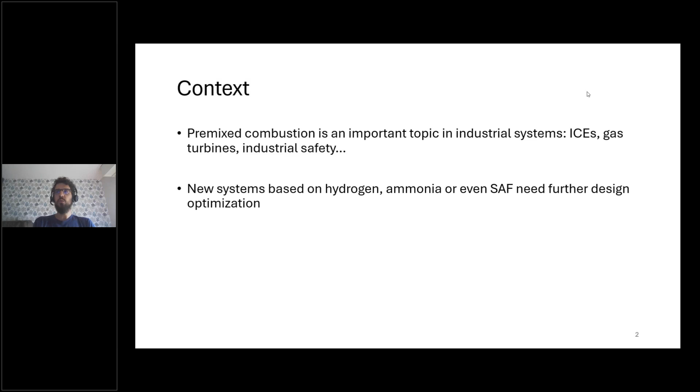Here I will be mostly interested in this presentation on premixed combustion. As you probably know, it's an important topic, especially with applications in industry in systems such as IC engines, gas turbines, and also industrial safety. Now there are a lot of new systems based on hydrogen, ammonia, or sustainable fuel, for instance, which need further design optimization. Due to that, there is a need to develop these new systems using advanced simulation tools, both to better understand the physics and also to assist the design.

So let's begin with some basics about premixed combustion, which will help me introduce the thickened flame model. Typically we solve the physics on a given numerical mesh, such as illustrated here, with a given cell size. Typically for the application we are interested in, it would be on the order of a few millimeters, 0.5 to a few millimeters, even higher for industrial safety, for instance. So usually much larger than the smallest physical scale we want to resolve.

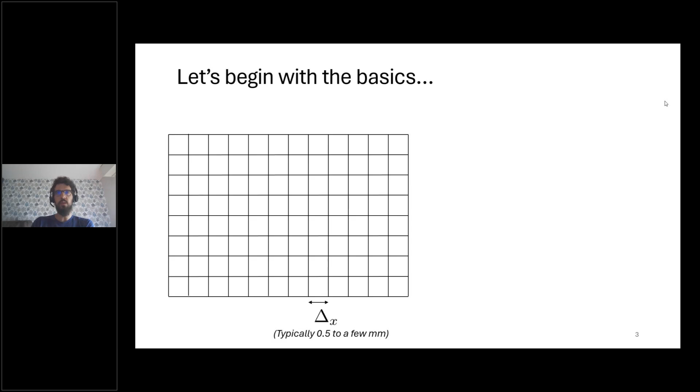And for that, we basically use models for at least the small scales. So in this presentation, I will talk about large eddy simulation. Also, there are some works, especially at CSI, for combining TFM with RANS. But here, in this work we did at IFP, we mostly focused on LES. So in LES, we solve part of the turbulence, the larger scales here in blue, and we have smaller scales here represented in orange, which are modeled.

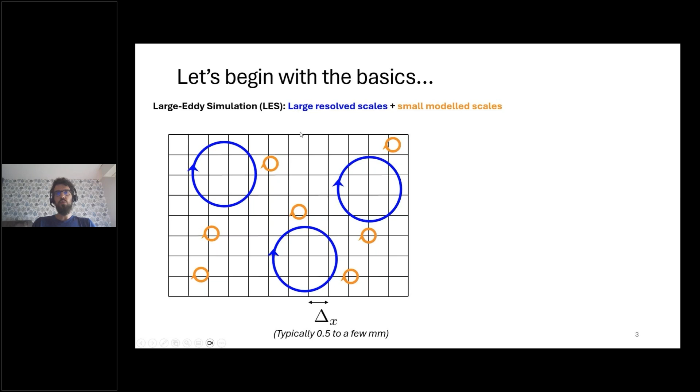In addition to that, we have a flame, so in premixed combustion, which is very localized and thin. And therefore, the first issue we have is that the flame is actually not resolved on the numerical mesh, so we don't have enough points to actually solve these fronts.

This causes also a second issue, which is that we do not solve numerically the interaction between the flame and the smallest turbulent scales, which, as I said, are modeled. So both of these issues need an adequate model to be solved.

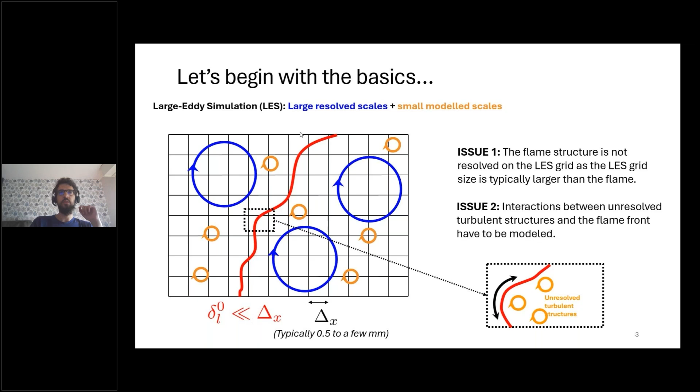And so this is where the Thickened Flame model comes in. It's one approach among many others. Here I will only speak about TFM, but there are also other methods, for example based on PDFs, which exist. So the TFM approach is pretty simple.

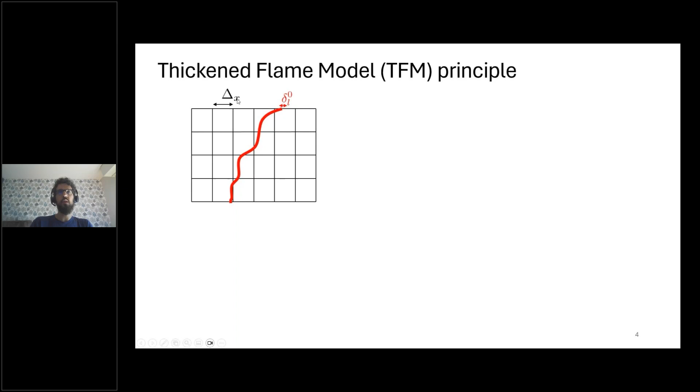So if we take again our scheme with the delta X and the flame, what we do in TFM is thicken artificially the flame front by a factor F. The factor F is defined based on a resolution criterion, which I call NRES here. Typically this is set by the user, and I can say, okay, I want 10 points in the flame front, and by imposing this 10 here, I will be sure that I have 10 points numerically in the flame front.

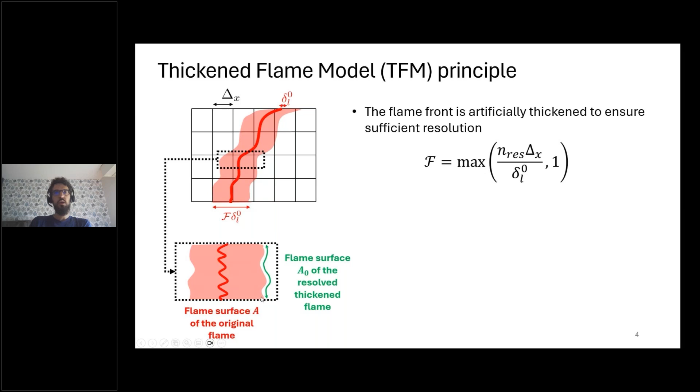Now, if we zoom in a little bit, what we see is that actually by thickening the flame, we are losing part of the flame surface, as you see here represented in red, what would be the real physical flame surface, and here the thickened one. This is due to the thickening. We can define what we call the subgrid scale wrinkling factor, Xi delta, which is basically the ratio of these two surfaces. And what this means is that actually the thickened flame would propagate more slowly than the real flame.

And so this needs to be corrected, and this is actually what is done in the TFM model. We define what is called an efficiency function, which helps at recovering the correct turbulent flame speed. I will highlight in the next slide exactly how you do it in equations.

And here, this is a small technical aspect, but since we consider unity Lewis number here, I will come back to hydrogen a little bit later. The efficiency is simply equal to the wrinkling factor - we don't have to correct for other effects. That would be the case for hydrogen.

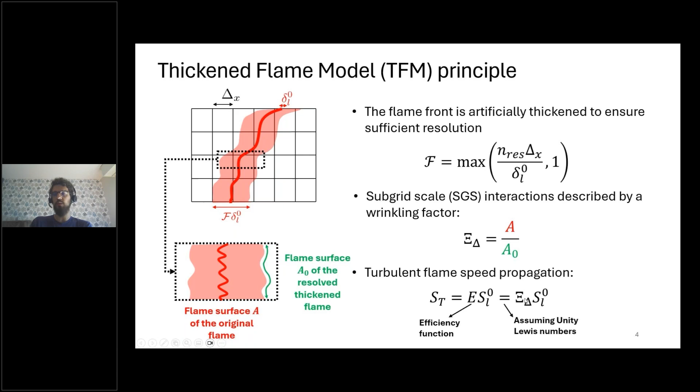So in practice, how is it implemented? Well, beginning from some known scaling laws, the laminar flame speed and the flame thickness can be related to the thermal diffusion and the reaction rate. We can modify the transport equation of each species so that the thickness is multiplied by F while the propagation speed stays the same, or is multiplied by this efficiency factor - actually what we aim to do in TFM. In practice, by using that, you can show that to perform this operation, you can multiply the diffusion by E times F and multiply the reaction rate by E divided by F.

And here, I want to insist that the reaction rate is still computed using SAGE, and we just add this multiplicative term here. So it can be seen as an addition to SAGE, so that the flame front is properly resolved and the turbulent flame speed is properly retrieved.

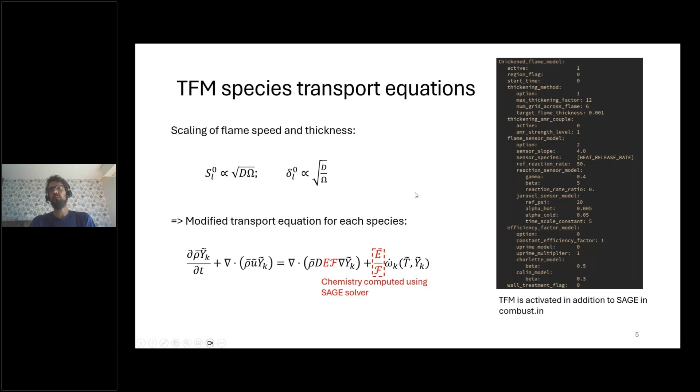And here I show just an example of an input file that you can find, to highlight the fact that TFM can be activated and parameterized in combust.in. It's a section for a thickened flame model. I won't go through all the parameters, but just to show that it's actually not that difficult to use. You might need also a table for SL0 and delta L0, such as in other models in Converge. But with this table and setting the parameters, the TFM can be run along with the SAGE.

Okay, so just to recap a little bit, we see that TFM enables a proper resolution of the flame front while resolving the chemistry - I insist on that. And it enables a consistent modeling of the turbulent flame speed propagation with models based on physics.

Now TFM has some adverse or side effects. I will highlight two of them in this presentation, which in our opinion for our application are the most important ones. The first one is an over-diffusion at ignition, which can lead to artificial quenching. And a second effect is modified response of the flame to stretch. I will go into more details later on these effects.

So basically, there are two approaches that we have imagined to tackle these issues. One of them is pretty pragmatic - we say, okay, thickening has some side effects, so let's reduce the flame thickening we need. And in Converge, there is a very handy tool to do that, which is Adaptive Mesh Refinement. So we developed some models based on AMR and TFM that I will show. And the second solution is to try to derive specific models to correct these adverse effects.

So for this, we developed some models, in particular for the stretch, which I will highlight. It's really these two solutions which can be derived, and as I will show, both of these solutions are quite complementary.

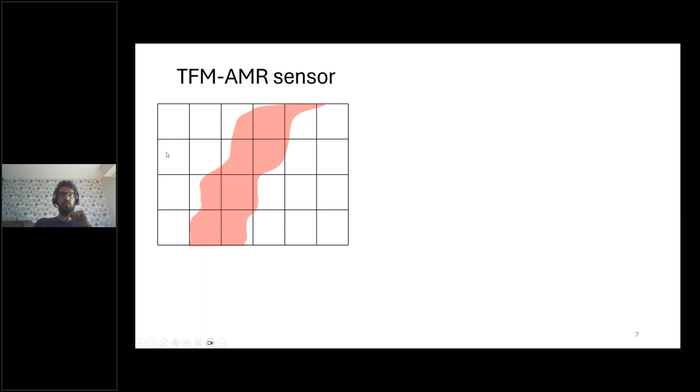So again, we assume we have a numerical mesh with a thickened flame. In practice, we don't want to apply thickening outside the flame because we would modify the diffusion artificially, which is not what we want. The theory of a thickened flame model only applies when you have a flame front. To do that, we define what we call a sensor, which I write S, a function equal to 1 inside the flame and 0 outside.

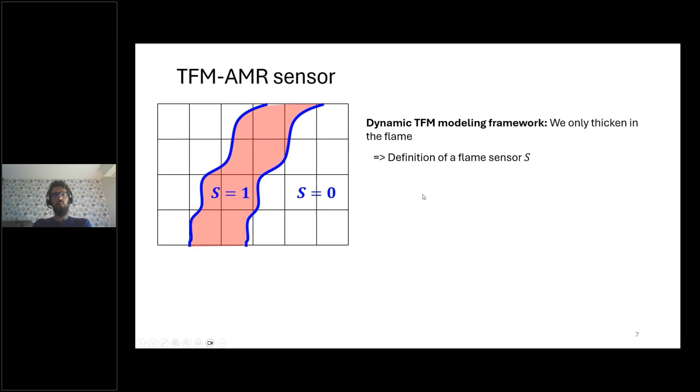Typically, there are different ways to implement this sensor, and in Converge there are different possibilities, which I won't detail, but if some of you are interested, we are happy to answer that. I'd say the most standard sensors are based on reactivity, while others could be defined geometrically using progress variables. This covers maybe two approaches.

So we define the final local thickening factor such that thickening is only applied inside the flame. The AMR comes at this stage: we simply and naturally say that we activate adaptive mesh refinement whenever the sensor is superior to 0, or equal to 1.

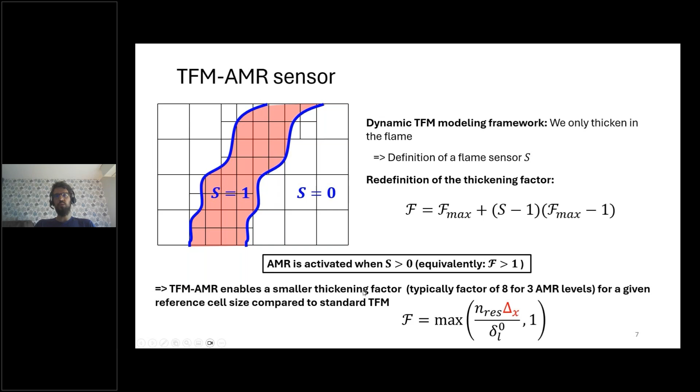In this way, we selectively refine the flame front, and we are sure we're really optimizing the number of cells. When we do that, we show that the thickening can be decreased by a significant amount, because each time we divide delta x by 2. So this is quite interesting to decrease the thickening and limit its effect.

So this explains how and where to refine. Now we also need to enforce a refinement level. Instead of having a fixed, user-set refinement level, we can actually define it automatically in a smart way. This is what we have proposed, and we have implemented two options to do that.

The first option is to select a target thickening factor, F target. In this case, the cell size is adapted automatically so that the thickening stays the same. The logic here is that if at some part of the domain we have a thickening factor of 10, it's not necessary that in other places we refine to have a thickening factor of 2, because the accuracy will be limited by the highest thickening factors. So this was the logic to define that.

We also have a second option, which is actually the one we use the most at the moment and that we advise, based on target flame thickness. Here the flame thickness is the resolved flame thickness, F times delta L0, and we impose this as a target, meaning that numerically we always solve the same thickened flame thickness.

This is very important when you have variable pressure or variable phi, because if these variations are high, such as in IC engines, the AMR could actually be very fine and very limit your computational time. So this option is actually much better for practical cases.

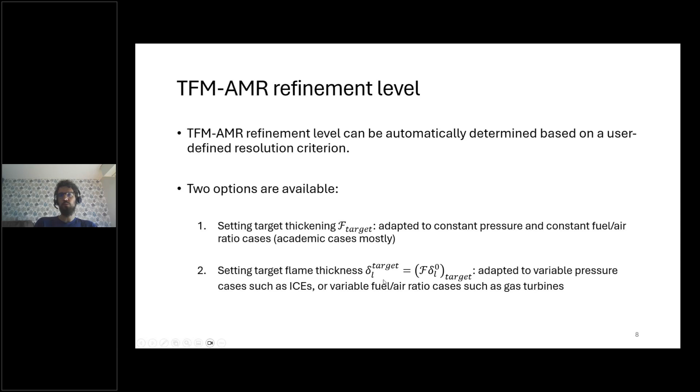Again, I want to highlight the simplicity of setting up TFM-AMR. Once you have set up TFM, you only have to add a variable called TFM-AMR index in the AMR.in file with embed above type. This is standard. And in combust.in, there are several parameters to set up: either we use F target or delta target, there are different flags, and we can define the values. So it's actually quite easy to set up.

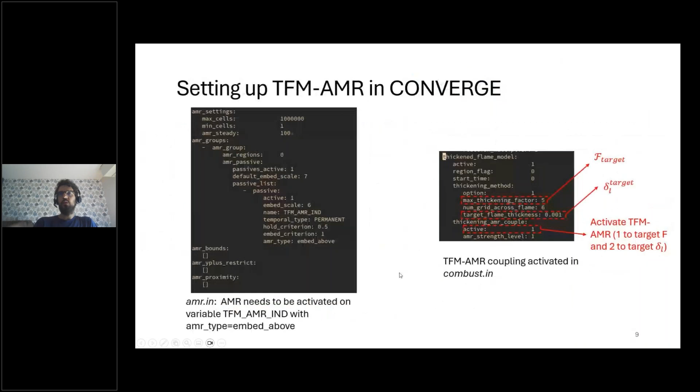Now, to finish on TFM-AMR, I'll show you an example, something we did a few years ago. It's now a pretty old example, but it highlights very well the interest of TFM-AMR. It's an academic setup experimented at Cambridge University, premixed or stratified. You have two inlets with two different equivalence ratios, which are set at the same value in the premixed case and at different values in the stratified case.

What we did here is use embedding with a coarse mesh of 1 millimeter, and we use two different AMR refinement levels in the flame with a target thickening of 5 and 2.5, meaning that delta X is here 0.5 or 0.25 in the flame front. So you have an illustration here.

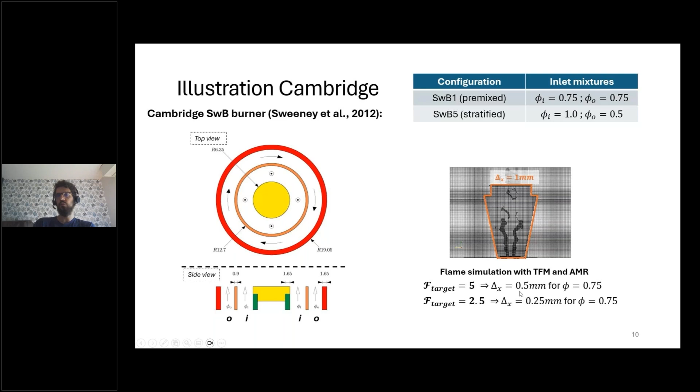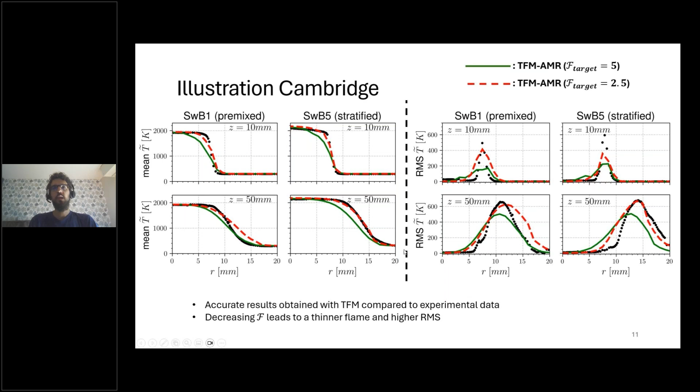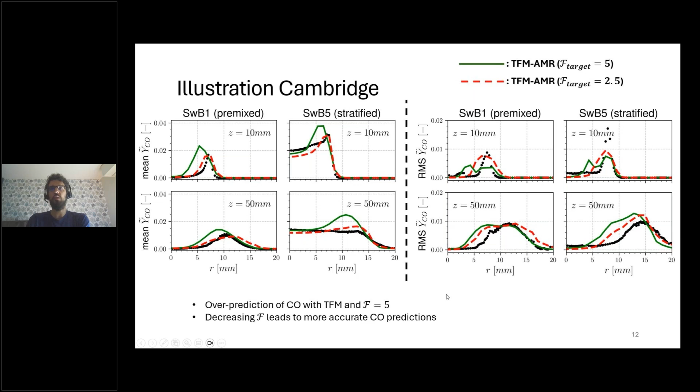Same for CO. I showed some results of CO, and the conclusions are the same. We are able to better predict the peak when we decrease the mesh, the cell size, with the TFM-AMR. So it's quite interesting — we're able to actually improve the intermediate pollutant results.

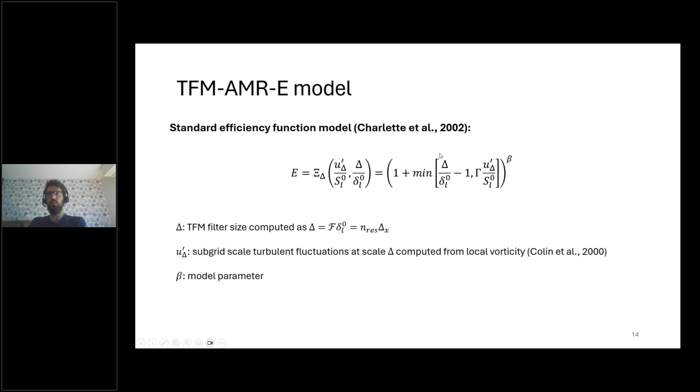Okay, so this is a bit the mechanics and the basic setup of TFM-AMR. Then I want to delve a bit further into the modeling of the efficiency. Here I give you a very standard model for the efficiency, which is the Charlette model. What I want to highlight is that these efficiency models are based on quantities such as the turbulent velocity fluctuation, U prime delta here, and a scale delta at which the fluctuations are actually computed.

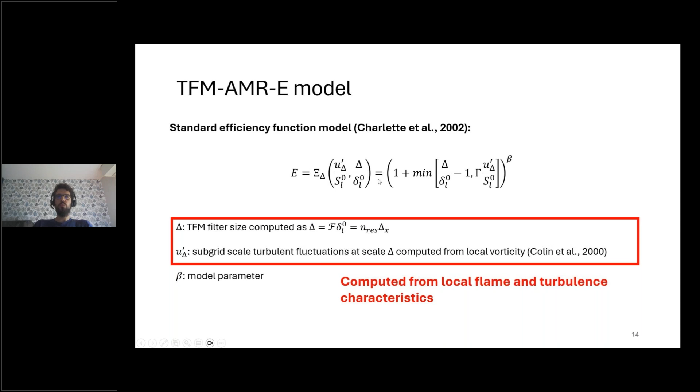So what is done typically in the standard Charlette model is to compute these values locally. For example, U prime is computed using local vorticity, and delta is a local scale. This is typically what we do, and we have a beta parameter which usually we set to be a constant.

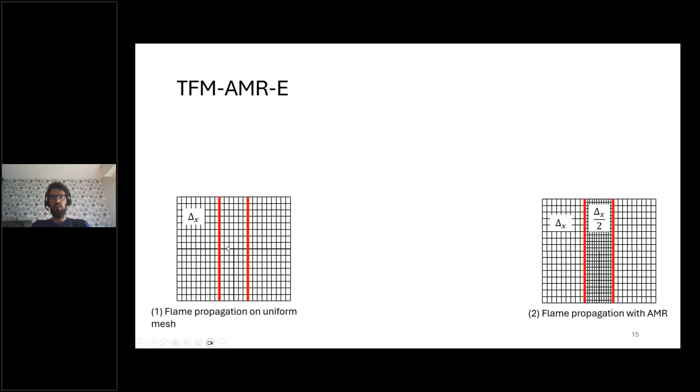Now let's take two situations: first one where I have a uniform mesh at cell size delta X, and a second one where I have AMR for the flame front, represented here by the red lines. If I look at the turbulent spectrum, we have a cutoff at 1 over delta X on the mesh at cell size delta X, and a cutoff at 2 divided by delta X for the fine mesh.

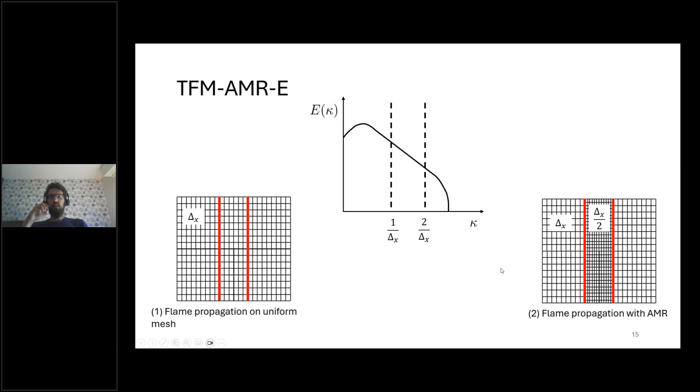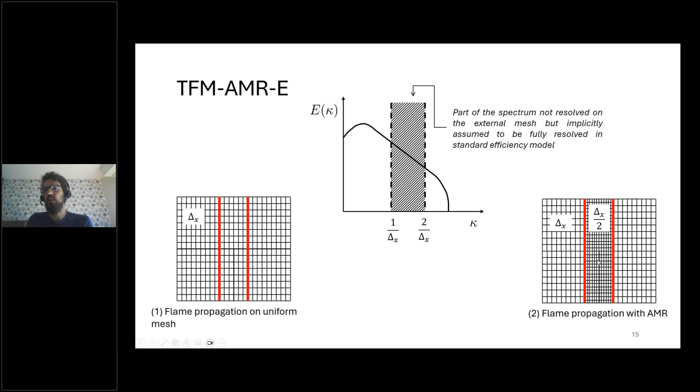Now, since the Charlette model computes U prime and delta locally, what it implicitly says for this case is that we assume a full cascade of the turbulence on the fine mesh. I don't have time to detail it here, but if you look at the Charlette model, it makes assumptions about the turbulence spectrum, and if you use it directly, you assume you have a full cascading of the turbulence on the fine mesh.

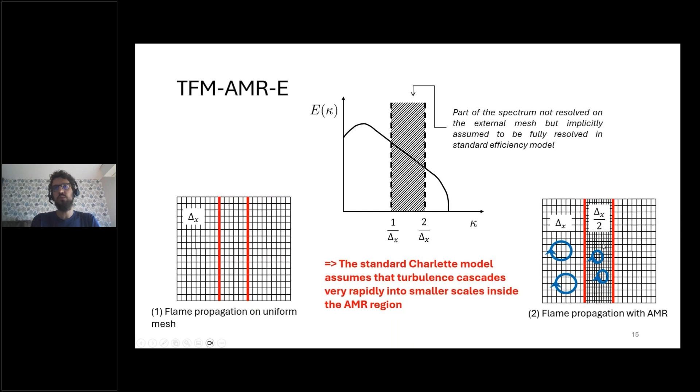Now the problem is that here we resolve turbulence up to a scale delta x, and potentially the cutoff is lower. But there is not necessarily time for this small scale to develop in the flame front, so it's not clear if we can use the local U prime and delta values for the Charlette model.

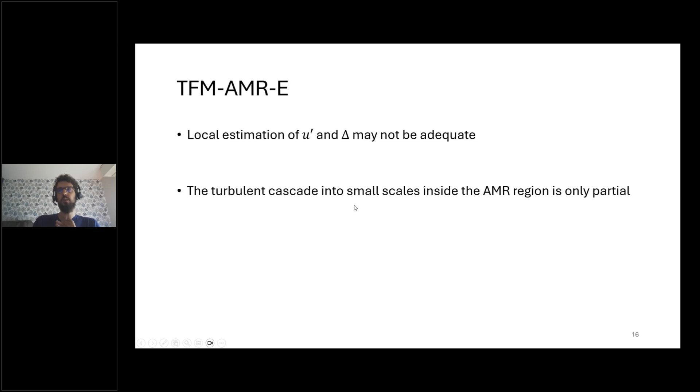This is what we challenged, which led to the definition of what we called in our paper the TFM-AMR-E efficiency model. We assume that the turbulent cascade might not be complete but only partial, and we developed a correction for that. This correction is based on a transport equation which mimics this partial cascading.

To do that, we defined what we called effective scales — delta effective and U prime effective — which are not the local U prime and delta values, but which try to take into account the cascading. There are very simple equations where we have a relaxation: we relax this effective value towards the local delta and local U prime with a turbulent time. This way we have a response of the model to the local turbulence.

And the delta local, we define it as a multiple of the cell size — gamma delta x — and the U prime is the corresponding velocity fluctuation computed assuming an inertial spectrum.

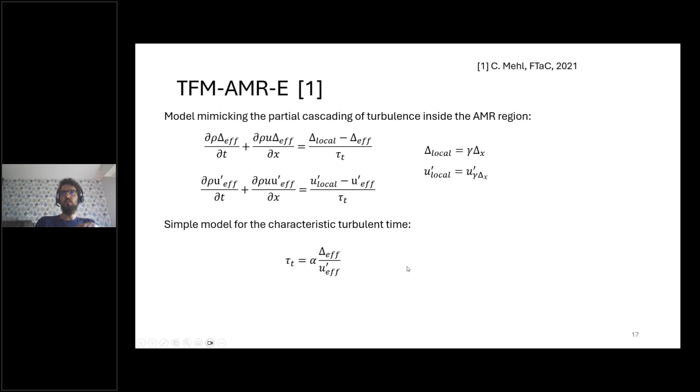And the turbulent time, we define it with a constant times the time scale, which we can build from the effective scales. So here you see we have two constants, gamma and alpha, for this model.

Just to emphasize a bit the behavior of the model: if tau t is much higher than tau f, so the flame is very fast compared to turbulence, actually the flame will propagate, but as the fine mesh here propagates on the coarser mesh, the turbulence does not have time to cascade, basically, because it's too fast.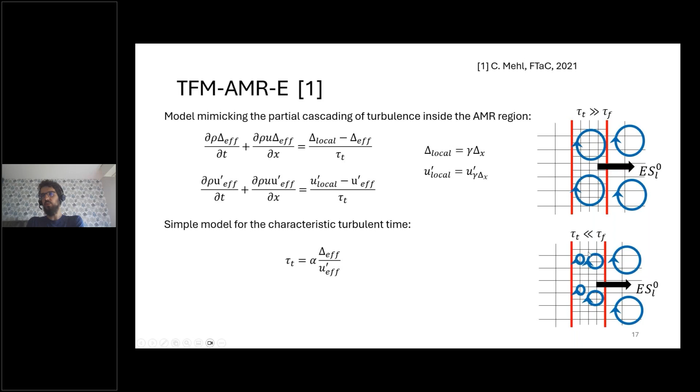And on the opposite, when the turbulent time is much smaller than the flame time, the flame propagates slowly into the turbulence on the coarse mesh, and the turbulence has time to decay. So this is basically what the model tries to do. And finally, we've simply defined the new efficiency based on the effective scales rather than on the local scales.

I will here just highlight the behavior of this model on a simple academic case, which is actually the one we used in our paper. If you want more details: it's a turbulent, homogeneous turbulence where we have a spherical flame kernel of isooctane which propagates. We considered two conditions, one atmospheric and one high pressure, with a given initial spectrum.

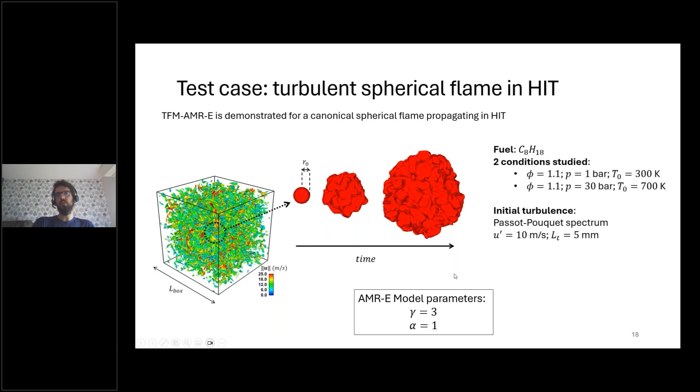And we consider here gamma equals 3 and alpha equal 1 as the AMR-E parameters. So in the paper, we do some parametric analysis if you're interested. Here, I just show you the final result with these parameters, which we identified as being good.

So first, I want to show you some fields. You have here the U prime, the local U prime on the top left, and the associated efficiency on the bottom, and the effective values on the right.

So you see with the local U prime, you have a very strong decrease of U prime inside the flame front, which, as said before, is due to the fact that we assume that we have a turbulence which is more resolved at the finer scales. And so we have this huge drop on the U prime.

And for AMR-E, you actually see that it's well smoother. So this is kind of a filtering effect due to the transport equation we solve. And more importantly, the values are larger. And this translates into a higher efficiency, as you see here. Well, it's much lower for the local U prime.

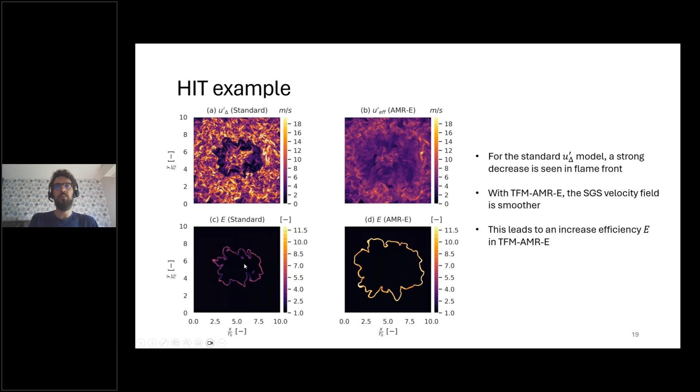And this we have actually seen, well, I don't show it in this presentation, but in engines when you use that, you get propagation which might be very weak compared to some experiments. So it's better to use this model.

And just quantitatively to show you a bit what happens, I show you here some results on the high pressure engine conditions and the atmospheric. So what we did here, we compared three levels of refinement in the flame: one without AMR and two with AMR 1 and 2. So these are the different symbols here, circles, squares, and triangles. In blue, you have the TFM-AMR-E model results, and in black, the standard TFM-AMR.

What we see here, so it's especially visible on the engine conditions: as you refine, basically the heat release rate evolution, the heat release rate actually is lower. So it really means that as you refine, you get a smaller efficiency and thus heat release.

And when you use the TFM-AMR-E model, the results are more consistent. So it's of course not perfect. It's still a model. We have also strong assumptions here to describe the turbulence cascading, but the behavior is better. And when we use AMR, we are still able to get heat release rates which are pretty large.

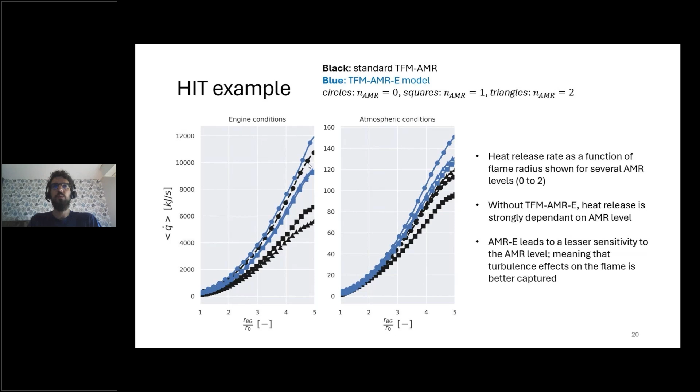And to give some kind of conclusion on TFM-AMR, so I showed that by refining, we can actually reduce the thickening factors and thus reduce a little bit some adverse effect of thickening that can happen. So it will be even more obvious in the next part when I talk about ignition.

But refining alone is not a solution because we have unresolved effects, and actually this partial cascading effect is really a good example. It's an illusion to think that we can just refine and everything will be nice. There are some costs to pay because we don't resolve everything numerically—here the turbulence—and thus we still need submodels, even when using AMR. So this is an important message, I think.

And now I will go into more details about two of these effects of thickening that I mentioned in the introduction. The first one being the effect of flame stretch—the effect of thickening on the sensitivity to flame stretch.

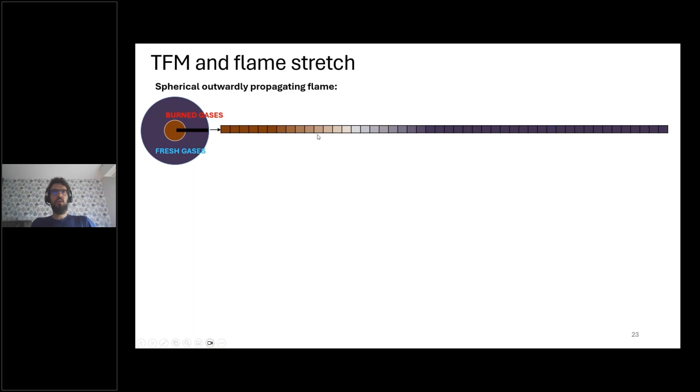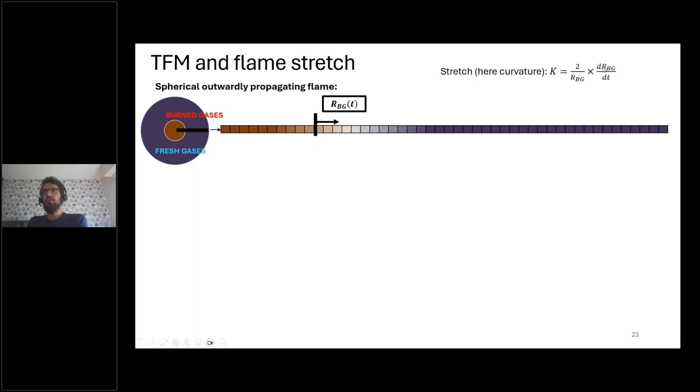I'll show you here a 1D solution. We can define a radius of the flame kernel, R_BG. From this radius, we can define the stretch. So it's basically a curvature. And we can define flame displacement speed as well from this setup. So we've done that for hydrogen in atmospheric conditions.

Typically on this type of configuration, what we are interested in is the evolution of the flame speed as a function of the stretch. So this is what I show here on this plot. This is not thickened. The standard behavior is that we have a linear asymptote towards small stretch values, what we call Markstein length. And we have a very standard formula, which is that the flame speed is equal to the unstretched flame speed minus this Markstein times the stretch.

Now we can compute the same flame using a thickening factor. So let's do that, for example take F equal to 8. We see that actually we have a strong increase of the Markstein length, which leads to a behavior that is really far from what is expected. In fact, it can be shown theoretically that the Markstein length is multiplied by F, and so that the slope here at close to 0 is multiplied by F. So this is what we obtain.

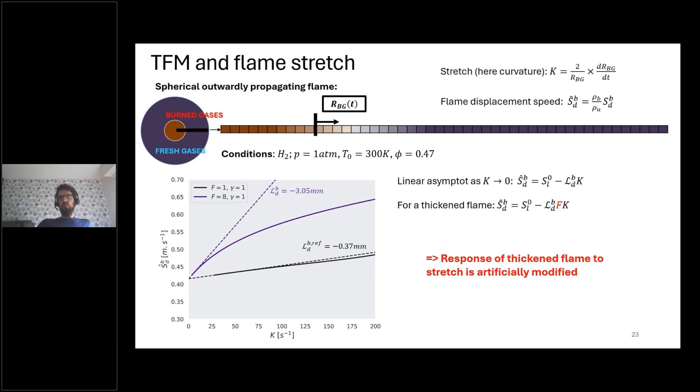And so the response of thickened flame to stretch is actually modified in an artificial way because it is not exactly what we expect. So at IFP, we have developed a strategy to tackle that.

Very simple, actually. So what we propose is to modify the diffusive properties so as to retrieve the correct Markstein length. Formally, we have new Schmidt numbers defined as factor gamma times the Schmidt number. And this gamma is estimated from 1D spherical flame and tabulated. So it depends on the conditions, of course, and it's tabulated and optimized to retrieve the correct Markstein length. Since we correct diffusion, we also modify the propagation speed, so we need also to add a correction, here RC gamma, to the reaction rates to retrieve the correct value of SL0.

And so in practice, this can be obtained with a lookup table. So at the moment, this is not implemented in the official Converge version, but it will be in the near future, with a tool to compute the spherical flames.

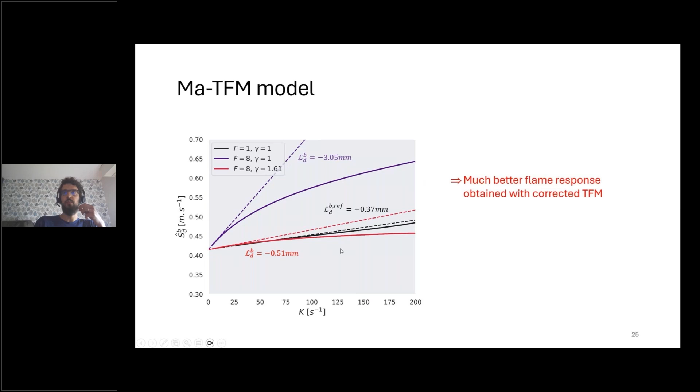And okay, so if we apply the model to the example I showed you before, we see that actually we are able to better predict the Markstein length. It's not perfect here quantitatively. There are also some numerical criteria in the optimization that we do, so it could be closer, I think, by optimizing a bit what we did, but we have a really good improvement of the results, and we are quite happy with that.

Now, so here what I showed you is for small stretch values. We also wanted to see if, by chance, by targeting the Markstein length at small stretch, we could also capture the behavior at larger stretch values. So to do that, it is more convenient to work with strain. We computed counterflow laminar flames because actually large stretch values are not easily found or computed in the spherical flames, since it corresponds to very small radiuses, basically. Whereas here, by using counterflow flames, we are able to go much higher.

So we did that. There are a lot of curves here, but I will just walk you through these plots. In black, you have the evolution for F equal 1, so the unthickened counterflow flames. It's propagation speed as a function of normalized stretch, where A-tau is actually strain, but since it's unthickened, it's equal to the stretch. Now, if we thicken without any model, we have the blue curve. We see that, again, we overestimate strongly the consumption speed, which is expected, as in the spherical flames.

And we applied our new model. We tested several variations in the optimization of the gamma parameter I showed. This is a technicality I don't want to get into here, but the message is the following: when you have small strains, the behavior is kind of good for the models, corresponding to the green, purple and orange curves, but we are not able to get the correct values at larger strains. This is something we see, and also people at other teams saw, that this model doesn't enable us to get correct results at large strain.

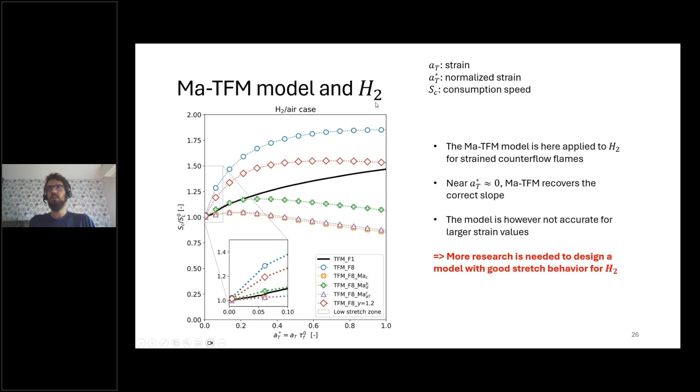So there is no model to do that, even in the literature, something we are still working on. And I didn't mention, but for standard fuels, we tested it for isooctane, and it works actually well for large strain. So it seems very specific to hydrogen, which again shows that hydrogen is quite a complex fuel to tackle.

Okay, so this was a small presentation of the Markstein TFM model for the stretch. Now I will go into a second topic, which is also very important, which concerns the ignition. And I will show you that thickening also requires some additional model to work well with ignition.

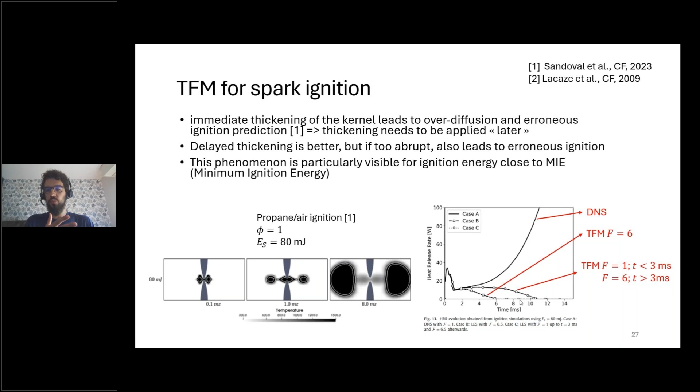The first idea that we had is, okay, let's maybe not thicken at the beginning, and after some time, we activate the thickening. So we did that, and we obtained this curve. We see that at the beginning it's better, but then it still extinguishes, so there is still a problem. So our take on that was that we actually need at the beginning to have no thickening, but to progressively increase it. It cannot be too abrupt.

So for this, we developed a new model which does exactly that, which we call the TFM-AMR-I model, as I will present. For this model, first we also implemented the energy deposition model derived from the ISSIM model used in ECFM. This is a bit independent of TFM, it can be used with SAGE and other models also. The only thing is it extends the ISSIM model to situations where we transport the chemical species. So we call that EDSIM, and this enables energy deposition.

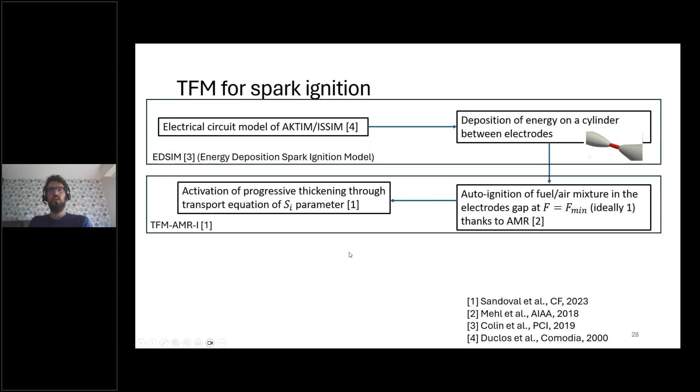Now going into what is specific to TFM, what we do is at the beginning, we ideally don't thicken, so with F equal to 1. In practice, because it's very difficult to reach AMR levels up to F equal 1, we use a thickening which we call F min, a small thickening factor value. And we use a progressive activation of the thickening, done with the transport of an additional variable.

So here I have a small plot to illustrate this in more detail. At T spark here, we have the spark. At this stage, F equals F min, and we define a criteria based on some variation of ignition temperature, which we call delta T ign. I will detail it in the next slide. So as soon as we are in an ignition phase, based on this criterion, we don't thicken, or we thicken at F min.

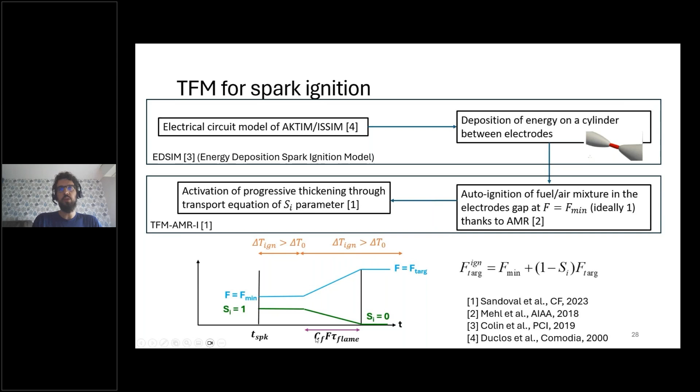And when this ignition temperature criterion becomes lower than our threshold, we begin the thickening, but we do it progressively over a time which is here F times the flame time. So it's the thickened flame time where we add also a coefficient CF, which is a user coefficient made to adapt a little bit this relaxation time.

So here I present in more detail this delta T ignition temperature. Very simply, we define an ignition enthalpy which we transport, so H ign. It's basically an added passive scalar in converge, for which we add a source term due to the ignition. This will progressively dissipate by diffusion, because after the ignition source term, we don't have any ignition anymore. And we can build this temperature from that.

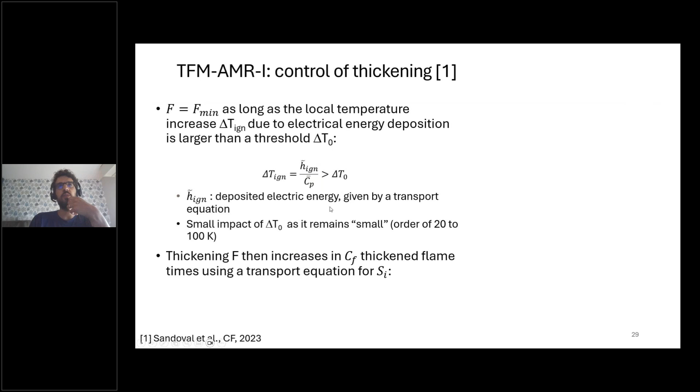To highlight it here, you have 3 iso-contours of this delta T ignition in black, red, and green with different values. What we say is that when we are inside these contours, we don't thicken. So as defined by the user, for example here we see that maybe the 100 value is a bit excessive, as we are really inside this zone, and by decreasing delta T0 to 50 or 25, we get larger areas. That's how it works.

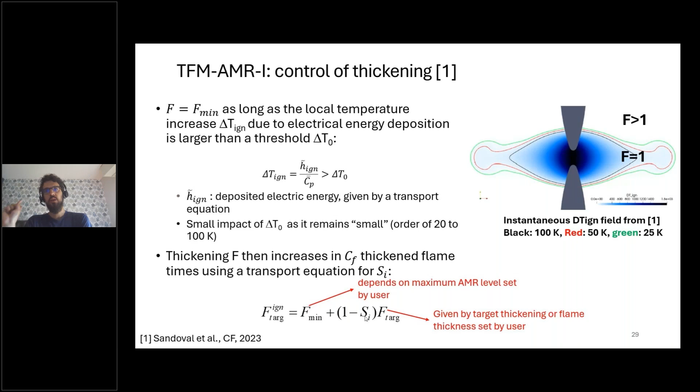And so finally, we transport this SI variable here, which corresponds to the variable enabling this progressive thickening.

So of course, we have done some academic setups to test that, and in this webinar I will just talk about one practical case we have done, which is a two-phase liquid-fueled gas turbine, academic, experimented at CORIA. Basically, the experimentalists defined several ignition points where they ignited with a laser.

We have decided to perform LES with 14 locations, 6 repetitions for each location, which is a bit small, so we don't have a proper statistical convergence, but it gives already a good idea of what we can perform.

So we use our new ignition model, and also the Markstein corrected TFM. I don't show it in this slide, but we found it was very important to correct for the stretch, even though it is not hydrogen here, it is heptane, but we have seen a strong effect of this model.

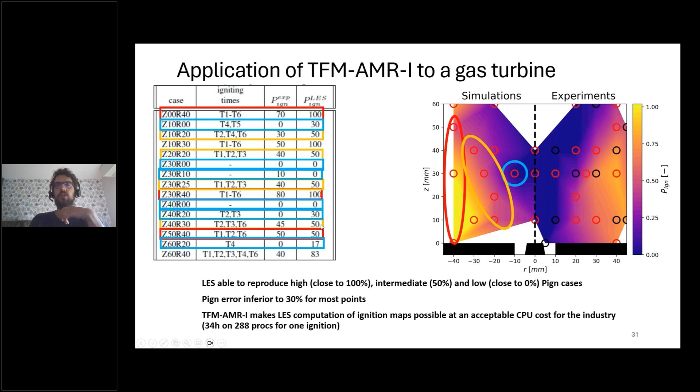So it means that we have repetitions where it extinguishes, others where it ignites. And of course, there are some points where it works a little bit less, where we have more than 30% of errors, for example this one or this point.

This can be explained first by the fact that we only have 6 repetitions, and also we have a very simplified model for injection. For instance, the green point here, we expect that the spray is not very well described. We actually have quantitative results showing that the spray here is a bit off. So it can also be due to the spray.

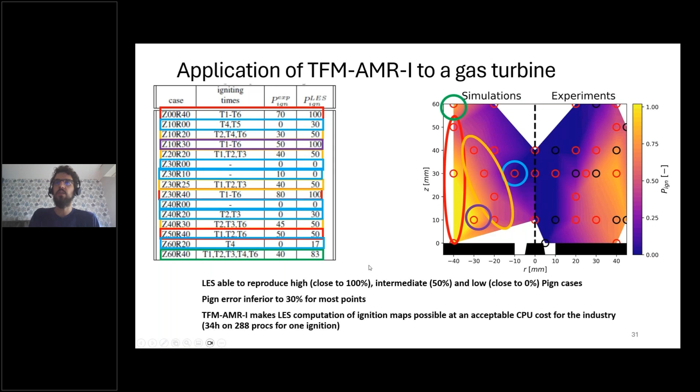But globally, we are able to perform this simulation with very interesting CPU cost. Basically, one ignition is around 34 hours on 288 processors, so it's really interesting, and we can foresee doing that on complex cases, even industrially.

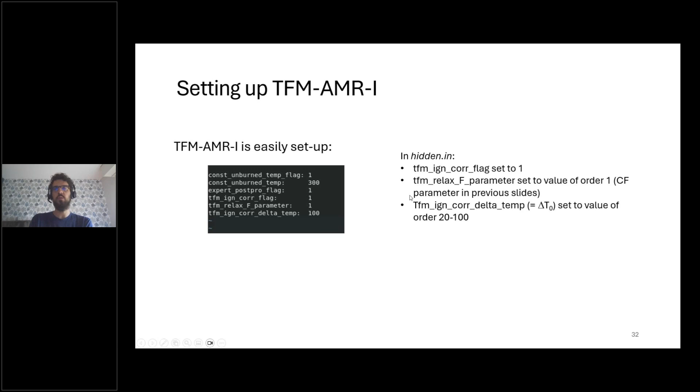Again, the setup, I don't go into details. It's some parameters in hidden.in, which are quite easy to set up. So to conclude here.

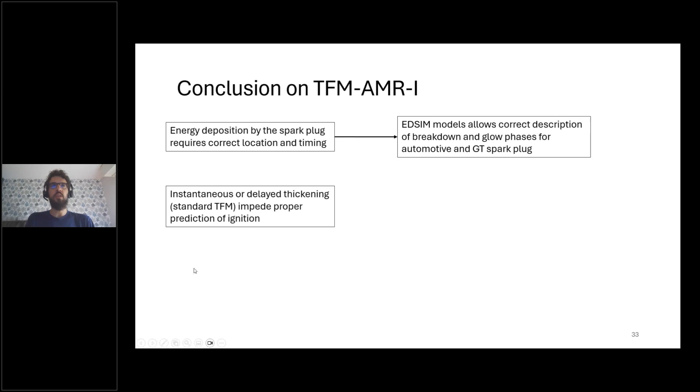On TFM-AMR-I, we define an energy deposition model which actually is not only linked to TFM, but can also be used in SAGE. And more importantly, we maintain the low thickening in the first ignition phase and increase it progressively. This enables us to get proper behaviors.

Whereas if we use the instantaneous or delayed abrupt thickening, we don't get the correct behavior. Also, one thing I didn't mention, I was a bit fast, is that this behavior is most important close to minimum ignition energy. We also saw that in cases where the ignition energy was very large, these effects are a bit less important, and the original TFM-AMR is actually not that bad.

So here we have selected cases where we are actually close to MIE, so when we want to predict ignition probability, which is of interest, but it is here where this model is actually the most powerful and interesting.

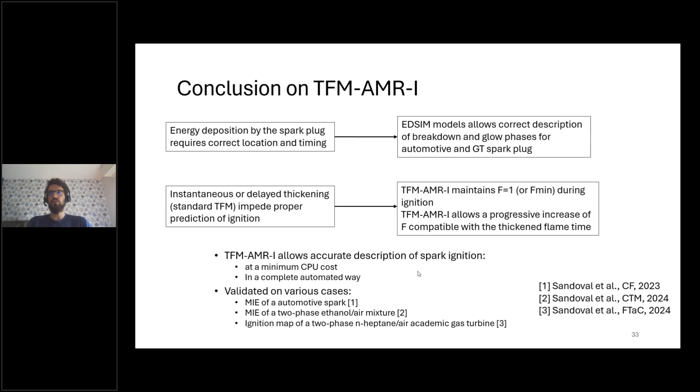Okay, so well, it's actually what I've said. The cost is good, it's entirely automated, so this is also important. There is no user intervention, but the parameters are set. It works well, and we have done several validations. You have 3 papers about that, which you can see if you are interested.

So now I spoke about spark ignition. There is a second problematic, which is spontaneous or auto-ignition.

This I won't repeat. In spark ignition, what we saw is that if we don't use a progressive increase of F, we don't have the correct behavior. In auto-ignition, what we see is that when you apply the thickening all along, you have an overprediction of the ignition delay. This is easy to understand because in TFM, you will divide the reaction rate by a factor F, so the reactivity is decreased, and therefore the ignition is overpredicted.

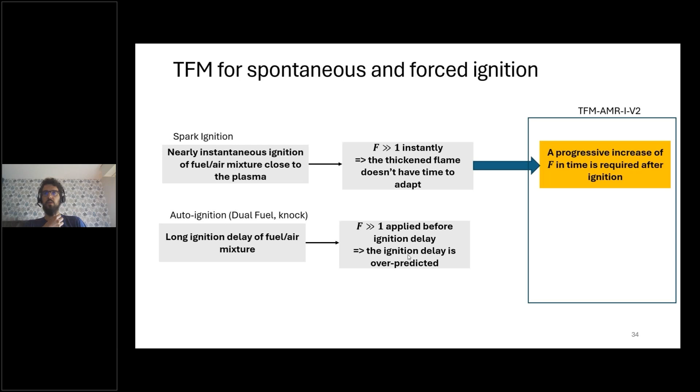So that's quite natural, and what we need to do for spontaneous ignition is to maintain F equal to 1 up to the ignition delay, and then also do the progressive thickening. So there is, as you see here, a complementarity between these two, spontaneous and forced ignition models.

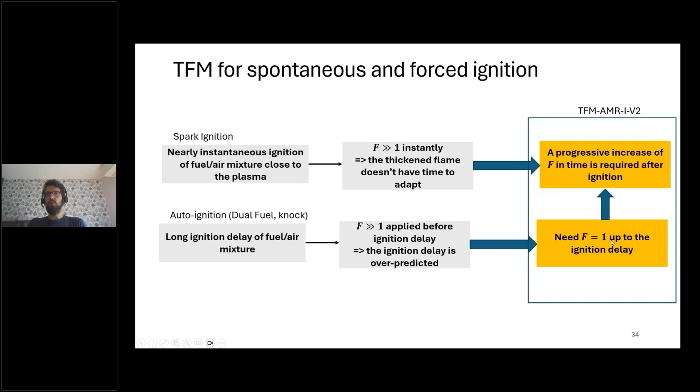And because of that, we developed a model which we call TFM-AMR-I-V2, which basically considers both of these effects.

So for auto ignition, here I will just show you the principle. The first ingredient is to detect when we have auto ignition, and this is done by detecting some burnt gases with an indicator which is called IB.

So when this IB is equal to 0, so there are no burnt gases, we only use Sage, and we use Sage plus TFM when this factor is equal to 1. And when it begins to be equal to 1, we use a progressive thickening again in a time which is F times the flame time. So we have this, it's pretty simple.

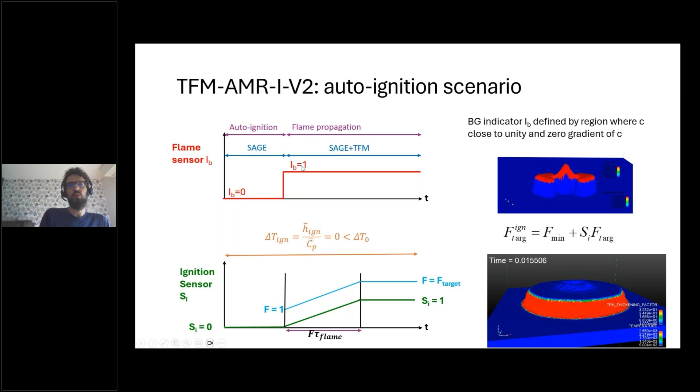Here delta ignition is 0 because there is no added source term, so this criterion is always satisfied. So we have this thickening only when the ignition has begun. Here's a small example to show: at the beginning, F equal to 1, you begin to have temperature, so burnt gases, and progressively the thickening factor will increase. The principle is pretty much similar to what we got before, it's only the methodology to initiate the thickening which changes.

I want to highlight that this strategy is fully consistent and compatible with the Spark model I've shown before. In the end, we have only one model for both ignition scenarios, and this is also convenient, it's really automated. In this case, you have the Spark. Delta T ignition, I mean F equal 1 or F min, which is kept until delta T ignition becomes smaller than the threshold, and that's it. I think I have a small video to show.

Maybe I can go a bit faster. F equal 1 here at the beginning because you are in the ignition phase, and progressively we get an increase of the thickening factor. That's what I showed earlier.

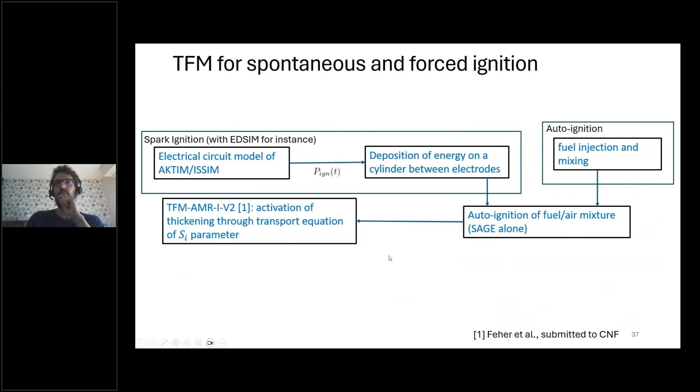So this is just a recap. In both cases, the model goes towards an auto ignition which is predicted using Sage alone, and then an activation of the progressive thickening. With spark ignition, we have the heat energy source deposition, whereas with auto ignition, it depends on injection and mixing, of course. This is work which is submitted at the moment to Combustion and Flame. It was the work of a PhD student, Sarah Feher, who is currently at CSI, and that's the work she has done.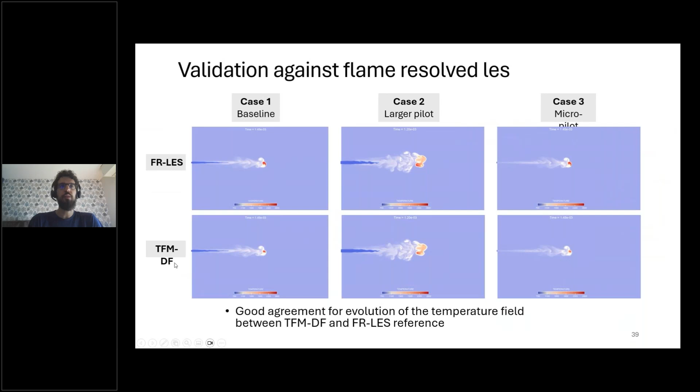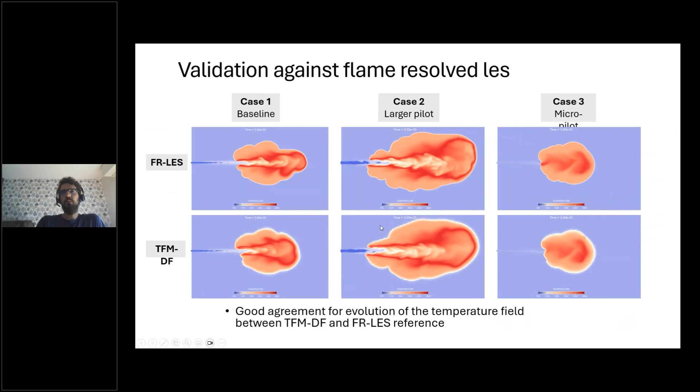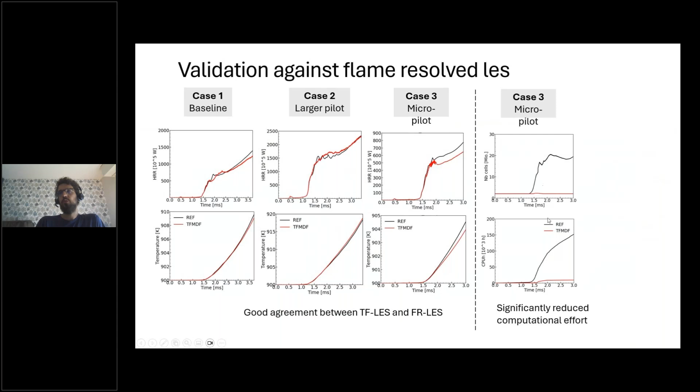On the bottom, the TFM, and we see that as time advances, we have very good flame behavior. It means the model behaves well, and we can see that quantitatively looking at heat release or temperature. The prediction is very good, and very interestingly, the computational effort is much decreased. It's really expensive to do the fully resolved LES, and the TFM costs almost nothing in comparison, as shown here with the number of cells on top and the CPUs on the bottom.

Okay, so that closes the ignition topic. Just as a quick summary, we saw that standard TFM fails at predicting ignition correctly, be it spark or spontaneous ignition, especially for spark, especially close to minimum ignition energy. With this new model, the TFM-AMR V2, we are able to include both spark and auto ignition. It has been validated on academic and also on dual fuel engines. All of this has been done in the PhD thesis of Sarah Feher.

Probably further industrial validation is needed in the future using this model. So if some of you have cases that could apply for this type of simulation, we'd be happy to test this model. Now, just to finish my presentation, I have a final topic, which I have just a few slides on because it's really preliminary work.

This concerns hydrogen and especially thermo-diffusive instabilities. As you all know, lean hydrogen flames are subjected to what we call thermo-diffusive or TD effects. It implies flame wrinkling, as shown here from experimental images that have been published, which leads to a strong increase of the flame speed, due to this increase of surface, but also to the local reactivity, because hydrogen responds to flame stretch.

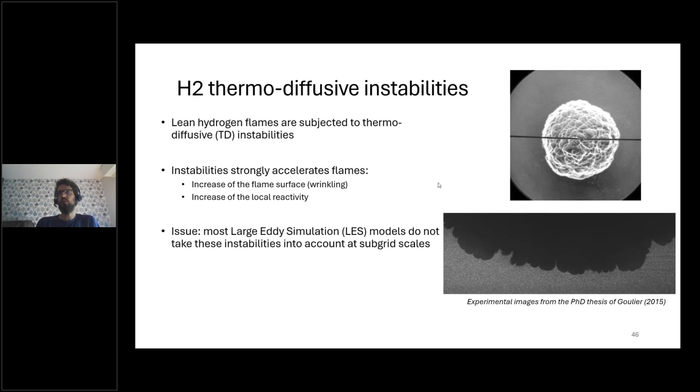LES models at the moment do not take this into account. So basically, if you plug a standard TFM model for hydrogen cases, you will underpredict this type of cases by a large amount, actually. The objective that we have, which is something still ongoing, we have a PhD student currently working on that.

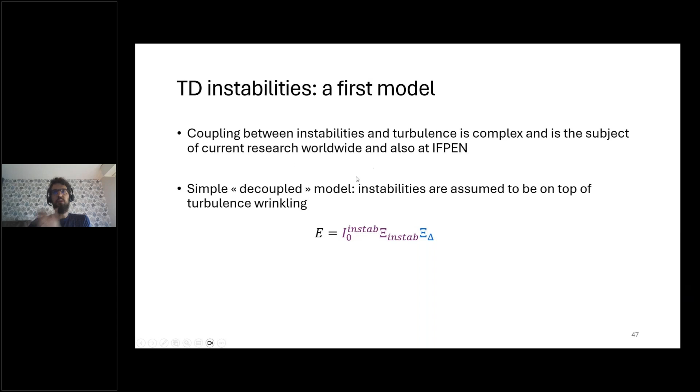But before that, we actually tested some very simple ideas. We wanted to assess the importance of these instabilities, so we assumed a decoupling between instabilities and turbulence, and added a constant additional efficiency in the TFM efficiency. So this is what we have done here.

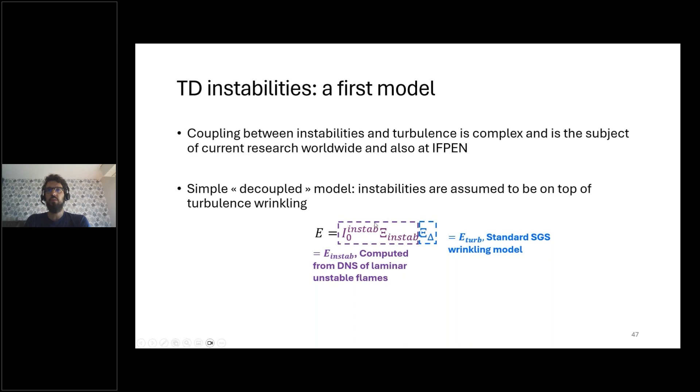We computed this constant term from DNS of laminar unstable flames. I show some examples here. We actually did that for 2D and 3D flames. So for 2D, I can go a bit faster maybe.

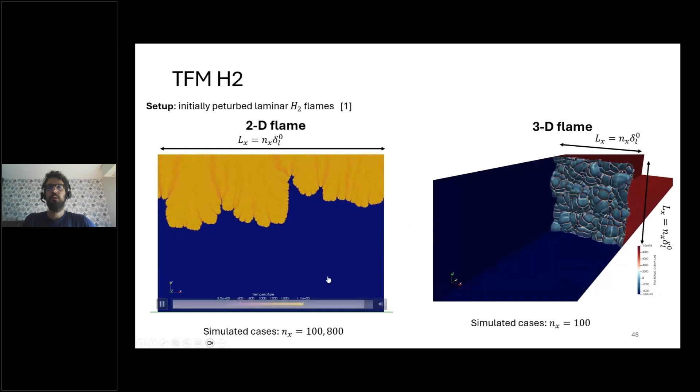So you see the typical instabilities. And what we have seen is that for 3D, acceleration is much faster than for 2D. It seems that taking into account 3D effects is important. So we did that for several conditions, and we analyzed that a bit.

So I want to show you an example of cases that we target in the industrial safety context. We are quite interested in this topic, and we tried to simulate an experimental setup designed at INERIS, which is another French institute specialized in safety. It's basically a box with hydrogen and air inside, and it's ignited.

We considered an ignition at P1 in our simulations. We have a flame which develops. It's roughly laminar in the box and becomes turbulent as it is vented out of this box. In these cases, we have a very large thickening factor of 100, so we could consider that all the scales of instabilities are at the subgrid scale.

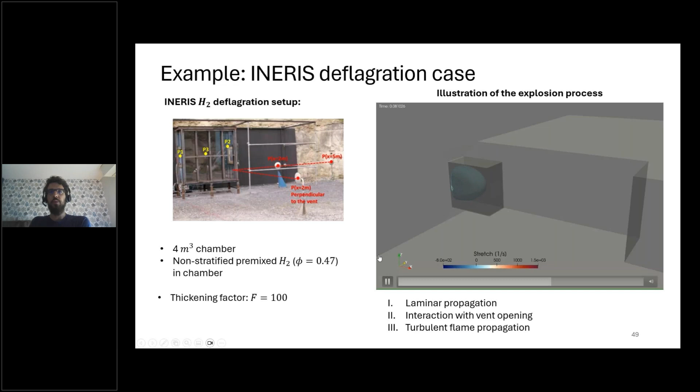Here I just show you some results to make my point. We had some experimental pressure probes that I show here. We first performed the model with no modeling of the instability, so we didn't add any efficiency of instabilities. We see that we have no signal at all, meaning that the flame is not propagating fast enough.

Then we tested the two values for the TD instability, one based on 2D DNS, the other on 3D. What we found is that a priori it's important to consider 3D instability effects. By taking this constant value, we get a pressure peak which is pretty accurate compared to experiments.

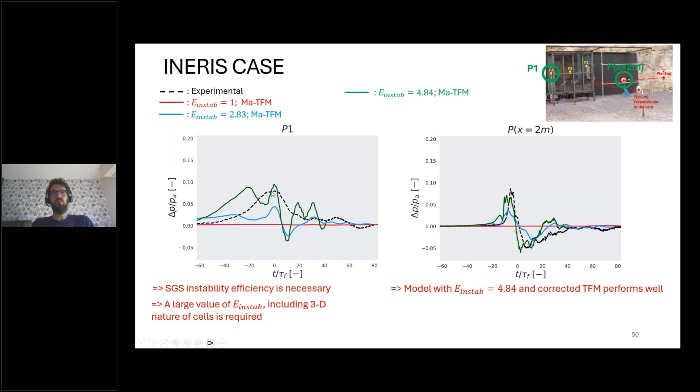Also, that's maybe just an illustration that if we don't consider the stretch corrected model here, it still gives bad results. So a point I want to make is that in this case, because the flame radius is very large, the curvature is low.

The stretch is actually small, and therefore the Ma-TFM model behaves pretty well because we are in the regime where it behaves well. But when we are more turbulent and with larger stretch, the behavior would not be good. So this is a case where the Markstein TFM could be used for hydrogen because of the low stretch values.

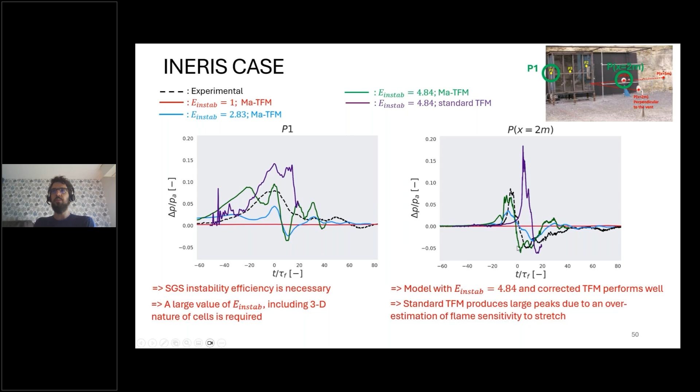Okay, so just to discuss that. This computation showed that we need to take into account thermo-diffusive instabilities to get accurate results.

And we are currently working on developing new models. We are testing out some models from the literature. We begin to see that there are some strong drawbacks, and we are trying to improve them and propose a new model. This is really ongoing, so it couldn't make it part of this webinar, but we have made really good progress on that as well.

Okay, so here comes my final conclusion. We have seen that TFM is actually a powerful turbulent combustion model for premixed flame because it really enables correct flame resolution, and we have good control over what we do, especially regarding turbulent flame propagation. So we can really inject advanced models based on physics and be able to control and model.

So the formalism is quite powerful when it comes to what I showed before with the thermo-diffusive instabilities, since it is based on the concept of flame wrinkling and reactivity, and we actually solve the reactivity. Instabilities can be integrated in a very easy way, I would say.